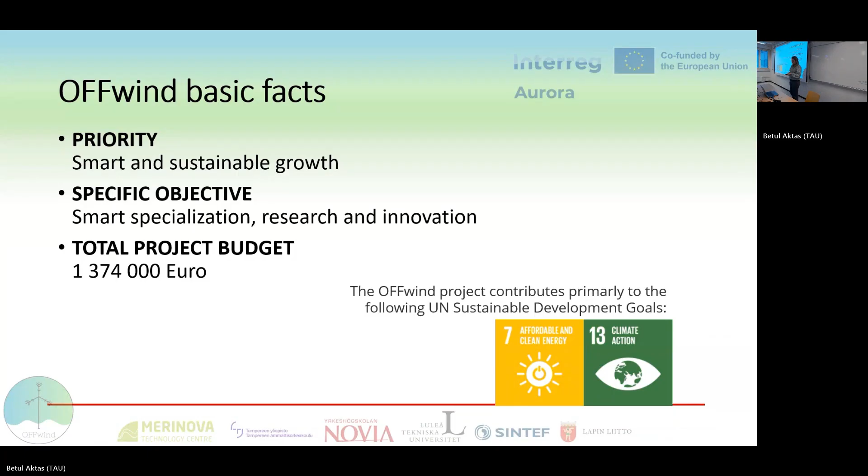About goals and aims of the project: the overall objective of the OFFwind project was to boost the uptake of offshore wind energy in the Aurora area by overcoming the Arctic challenges. We have reached this by working on the aims in the second paragraph.

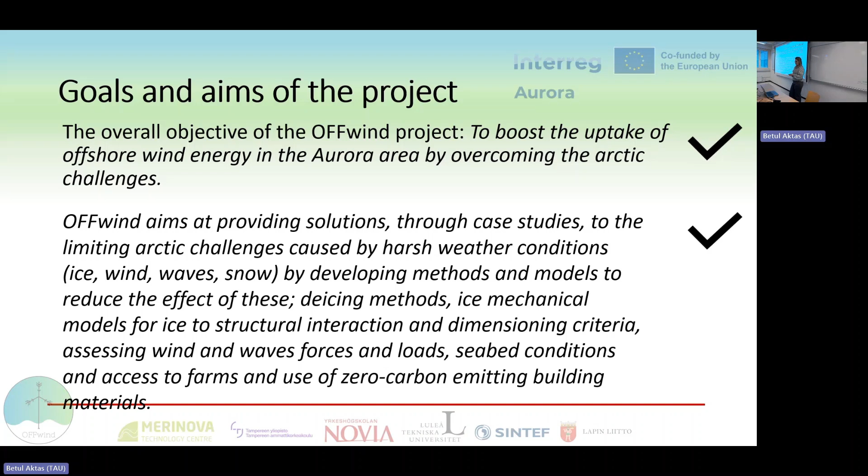We have to provide solutions through case studies to the limiting Arctic challenges caused by harsh weather conditions, ice, wind, waves, snow, by developing methods and models to reduce the effect of these: de-icing methods, ice mechanical models for ice structural interaction and dimensioning criteria, assessing wind and wave forces and loads, seabed condition and access to farms, and use of zero carbon emitting building materials.

We are a consortium that provides complementary skills to the project. Luleå Technical University comes with concrete technology knowledge. SINTEF with knowledge about ice condition, ice mechanical and ice structural interaction. Novia with icing and de-icing knowledge, and Tampere University with surface modification and coatings as expertise.

We have also made some very valuable excursions: first to the wind farm site in Korsnäs with the whole team in 2023. Also a smaller team did ice measurements on the wind farm site in Korsnäs in 2024. We also visited the High Water Bridge construction site in 2024. This is in our region, and we got a good view on how to construct and build in marine and cold climate.

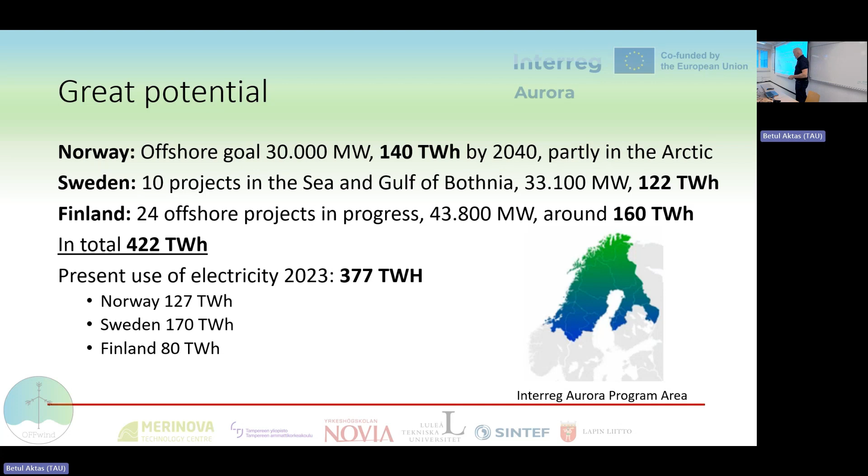Here we see the Interreg Aurora area, colored to the bottom right, and we have the Sea and Gulf of Bothnia, Northern Baltic Sea, and the Norwegian coast, of course interesting for wind power.

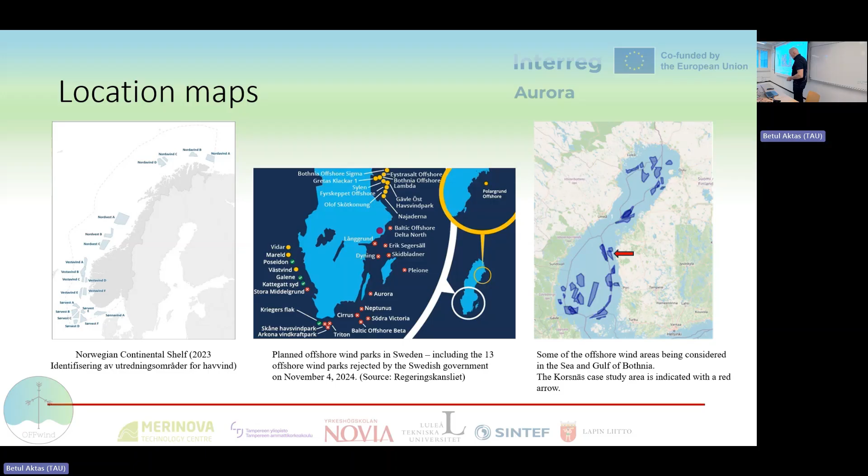Interesting when we look at these 10 yellow parks in Sweden and one very far north in Polargrundet in the North Bay of Bothnia. Interesting is the depth, between 18 and up to 80. To summarize, inside the Baltic, the Bothnia Gulf and Sea, it's suited for bottom fixed turbines.

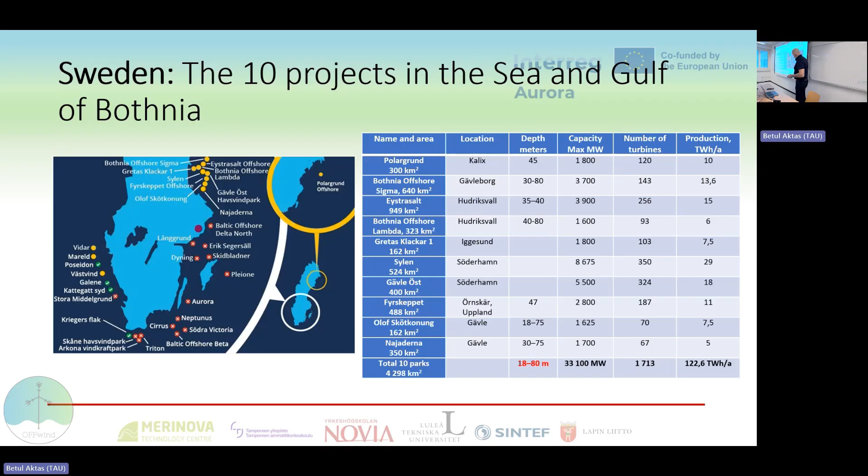This is in general. Now in Vasa, where I come from, ABB makes subsea power stations, then transformers, subsea transformers. So that is also one alternative. It does not have to be above sea level, it can also be a submarine transformer.

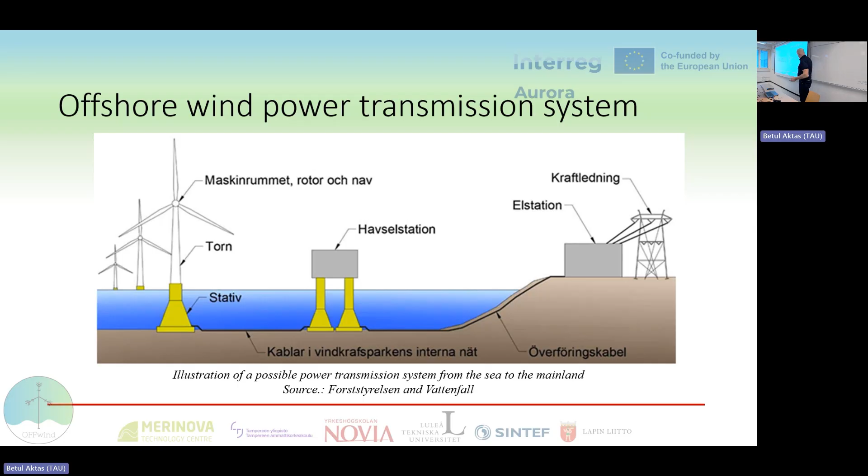We have Korsnäs. I think the Korsnäs case, Vattenfall Metsähallitus Forststyrelsen, is quite representative for a park in the Baltic Sea. We see here offshore turbines and two alternatives for cables. The onshore connection will be to the power station in the north where the airport is, around 50 kilometers, and a considerable distance to Åback and Kristinestad in the south, 80 kilometers.

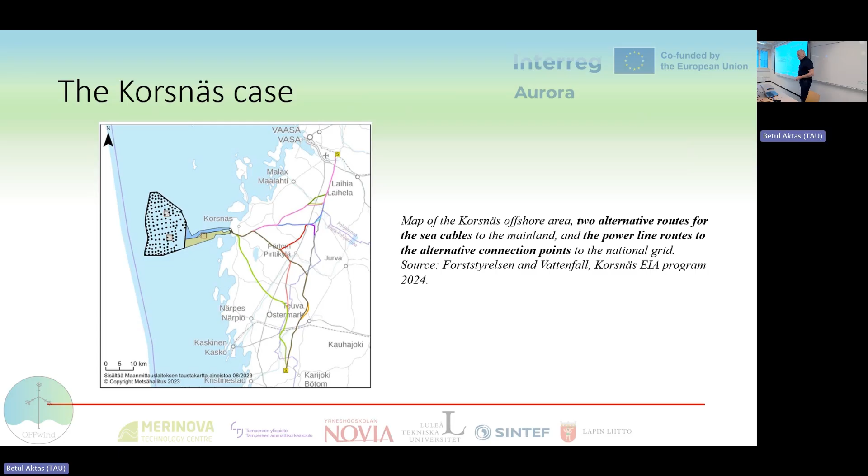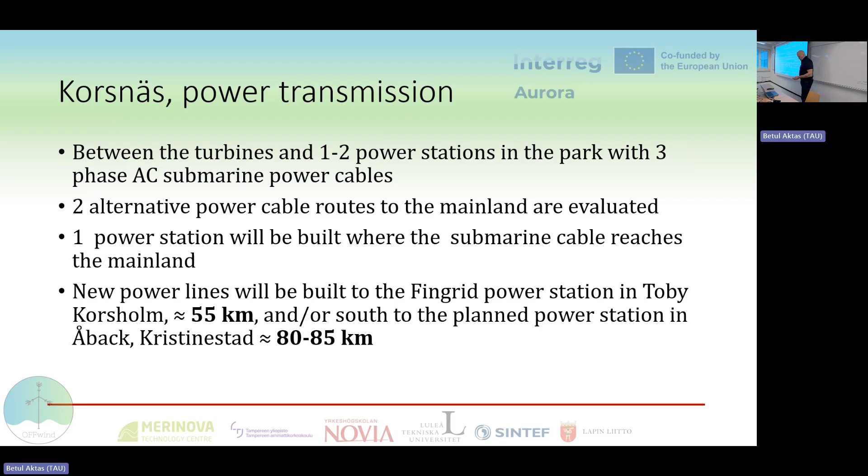So one central factor in the feasibility of the park is, of course, who pays for the grid connection. In this case, because we don't have a stable grid near the sea in most places, it's a considerable cost. There will be 55 to 85 kilometers of onshore connection, which is not free.

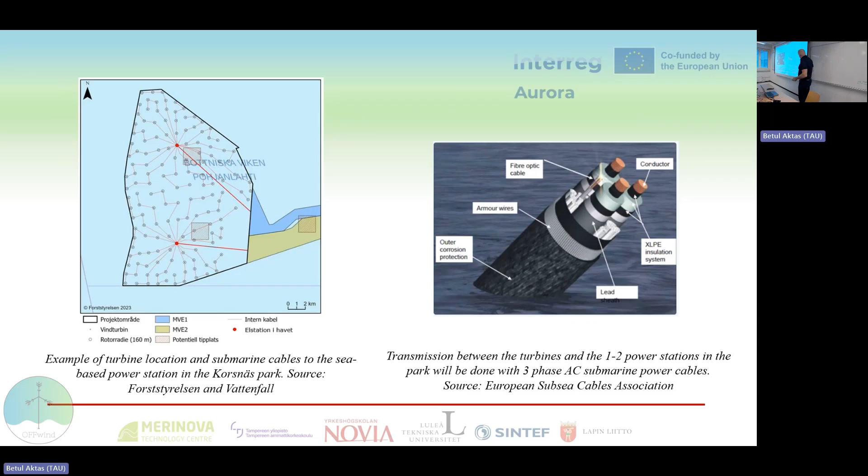This is an example of the Korsnäs layout from the EIA program, and then the three-phase cables, most likely to be used for submarine cables, used in the transmission inside the park to the substations.

Some facts of the Korsnäs park, I think it's quite large, but representative of the projects ongoing in the Sea and Gulf of Bothnia, also quite similar to the Swedish parks in many ways: 15 to 30 kilometers from the coast, quite good wind speed, 9.3 to 10, and the stated max capacity in the program is 25 megawatts.

Talking about the parks now, I've looked at turbine sizes between 15 and 20, up to 25 in capacity. So that means it's an evolving industry. Every new turbine size is basically a prototype with some surprises, not so easy to predict. And the height is many times between 300 and 400 meters.

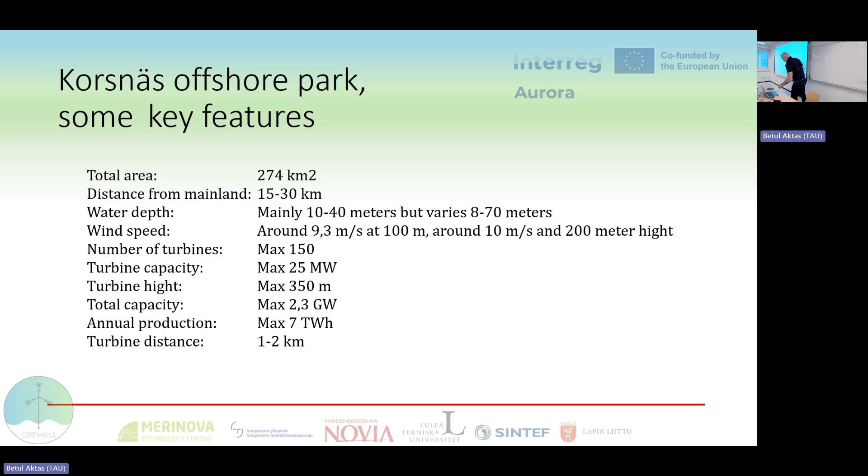I was talking to experts some years ago, and they said we don't fully know what happens in the air so high. There could be some low-level jet streams and so on. On the west coast in Vaasa, we've had 2 rotor blades break, due to very high and very strong powers.

Challenges - then of course icing. We will hear about that, both on turbine rotors, pack ice and drift ice, ice damage on submarine cables, ground waters, remote locations, accessibility, maintenance problems, long distances to connection points. We have north-south in all three countries limited power transmission capacity - people in the south, much of the generation in the north, salty challenging environment, and an evolving, developing industry.

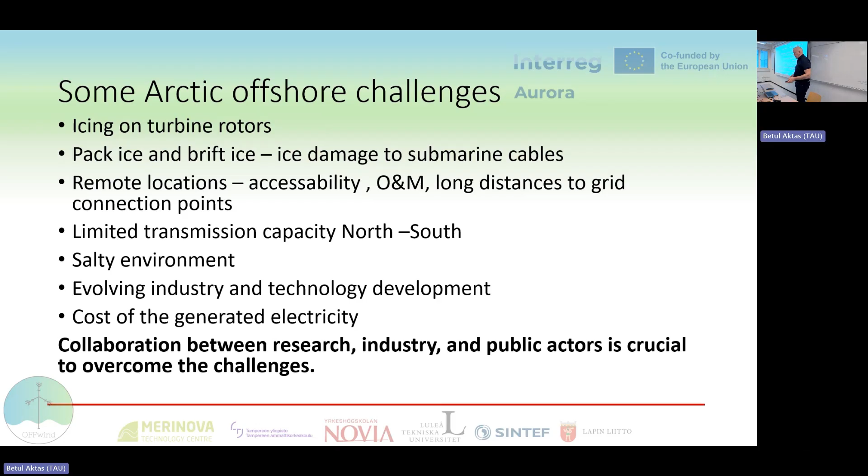There is no mass production, it's more on the level of prototypes. So the cost of generating this electricity is not the cheapest, but there are a lot of challenges, and I think collaboration is needed to solve these challenges between industry, public sector, and different institutions with specific competence, to overcome them.

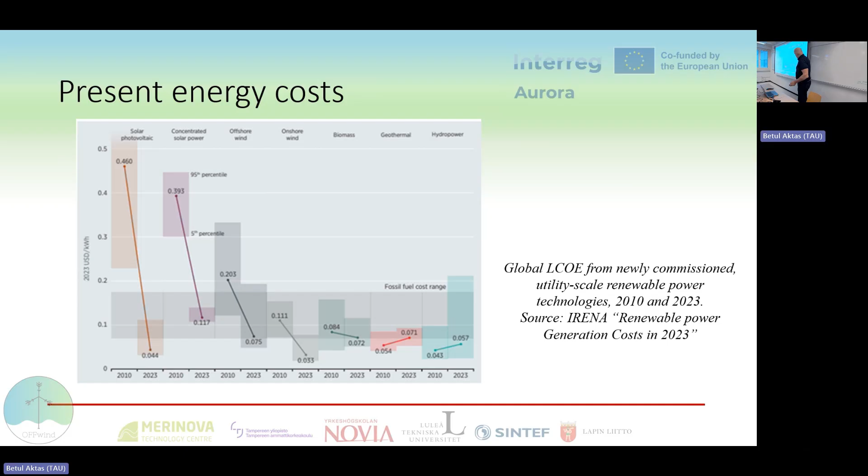We have, to the left, seen a dramatic drop in the solar PV sector due to mass production in millions. Also offshore and onshore wind power has dropped, and there are predictions about future offshore costs, summarized in the table to the right.

If we look at 2050, this is the mid scenario: a fixed bottom offshore park is predicted to reach around 72 dollars per megawatt hour, equal to 7 cents, and floating will always, I think, be more expensive. In the optimistic case, it could go down to 6 cents, but predicting the future is very difficult.

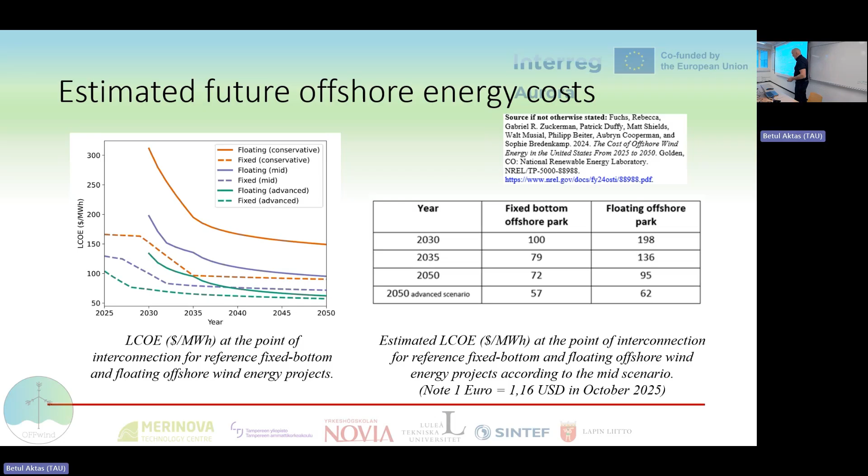So you see the gap between the orange top line for conservative predictions for floating, and the fully drawn green line, which is the most optimistic scenario, versus the pessimistic one for floating - it's a big gap, very difficult to predict. Thank you.

Hello, my name is Bjørnar Sand, and I'm going to present a preliminary environmental and technical feasibility study of offshore wind turbines in ice-infested waters.

An offshore wind park is located in cold region marine environments with seasonal and dynamic ice conditions. This is an early phase development of an offshore wind park, so full implementation is not considered in this project. The primary objective is to understand the environmental load, ice and metocean pre-assessment, evaluate the technical feasibility of gravity-based foundations for wind turbines in ice-infested waters, and develop a general framework for ice metocean pre-assessment and feasibility study assessment of gravity-based foundations.

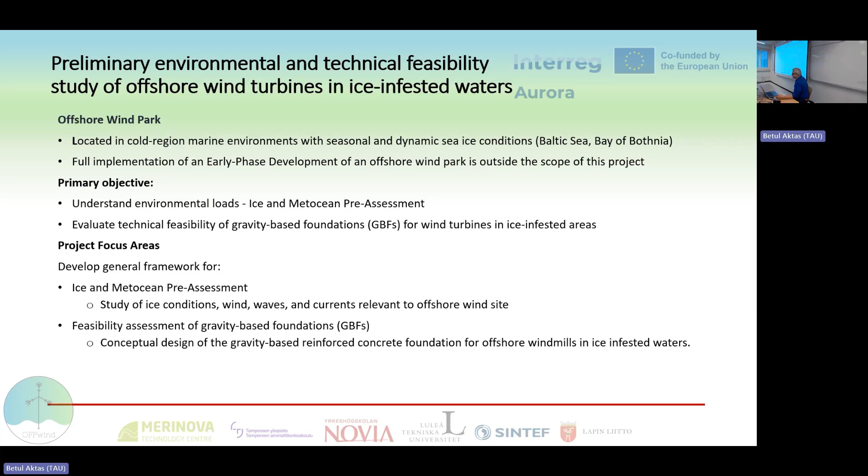As a case study, we have looked at the Korsnäs wind farm area outside Vaasa off the Finnish west coast. For the environmental study, we have used a total of 4 weather stations and 2 buoys in the sea, using temperature data for estimating ice thickness, marine weather observation, wind speed, wind gust speed, wind direction, wave height, wave periods, and wave directions.

For estimating ice thickness, we have used a generalized extreme value analysis, with the objective to estimate the extreme ice thickness for structural design of offshore wind farms. The data source is the FMI weather stations at Korsnäs. We fitted the generalized extreme value model to the historical data, and the goal is to find the 50-year return level of ice thickness, which is approximately 0.8 meters.

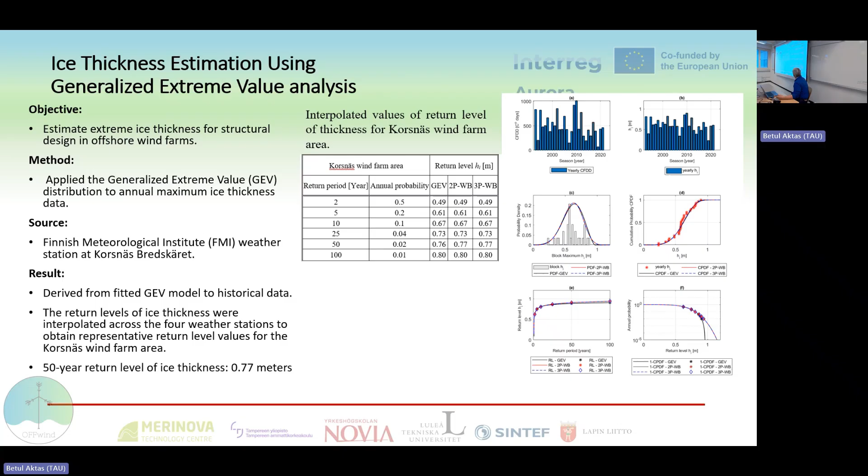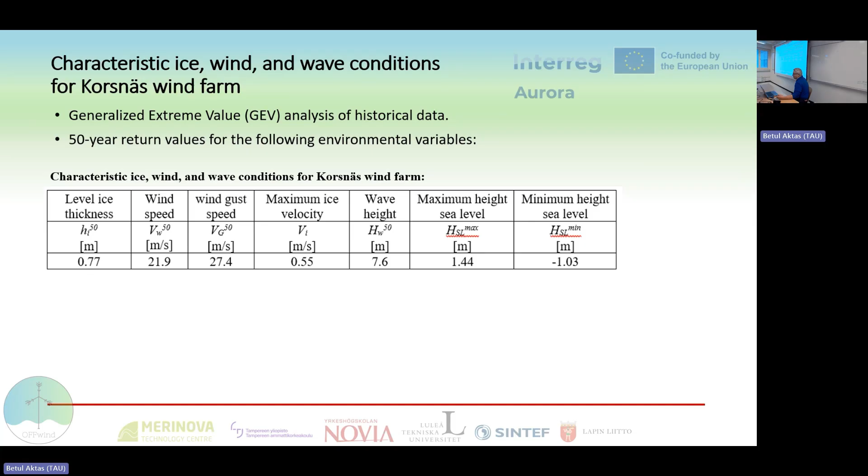Characteristic metocean conditions for the Korsnäs wind farm area: the level ice is 0.77 meters, wind speed 21.9 meters, and wind gust is 27.4. The maximum ice velocity is approximately 0.6 meters, wave height 7.6, maximum wave height, high sea level is 1.44, and minimum sea level is -1.03.

We have done some optimization framework for gravity-based foundations in ice-infested waters. The purpose was to find a preliminary feasibility assessment of gravity-based foundations for offshore wind turbines in ice conditions. We used a MATLAB-based optimization platform and focused on geometrical optimization, aiming to minimize the concrete volume. We used design criteria for stability and overturning, load capacity, structural stress limit, combination of eigenloads and environmental loads, and the ballast of the structure. Stability is done in the ultimate limit state using partial factors for load and soil properties.

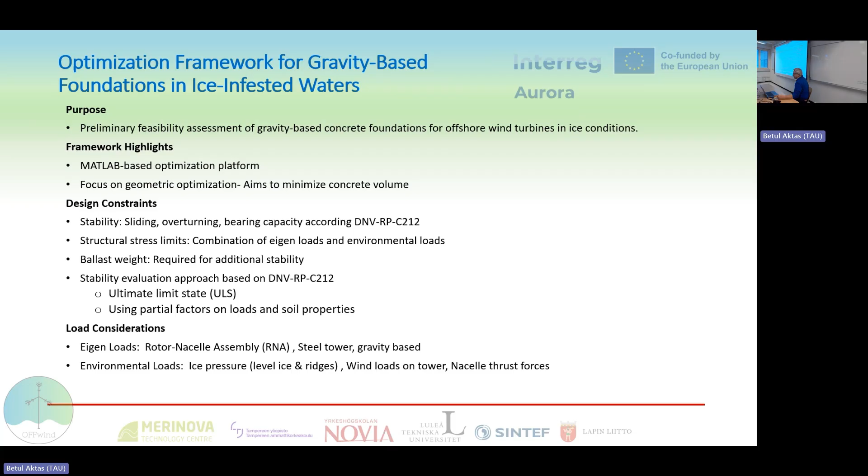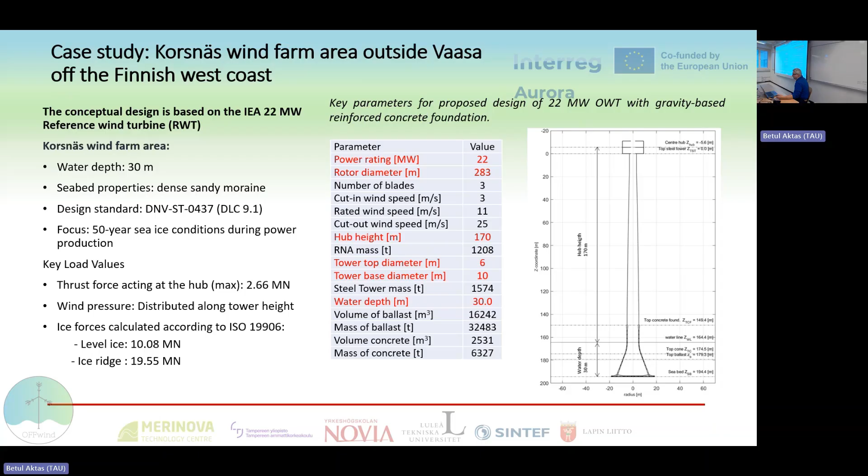Tower diameter at the top is 6 meters. Tower base diameter is 10 meters. Water depth is 30 meters.

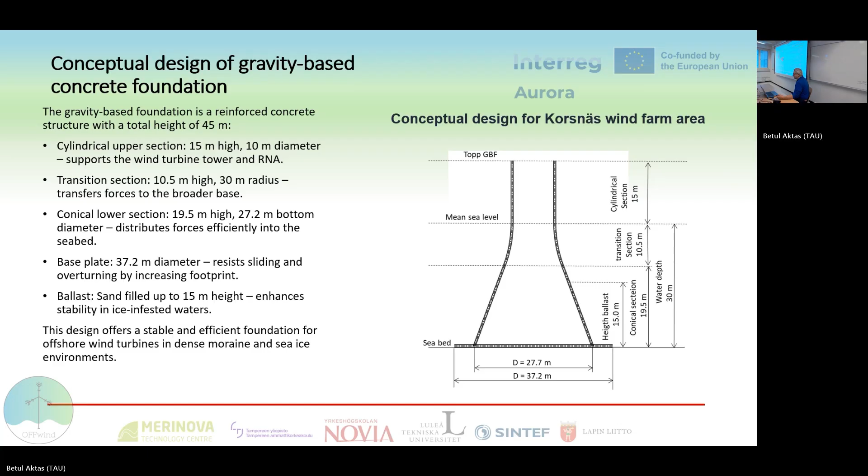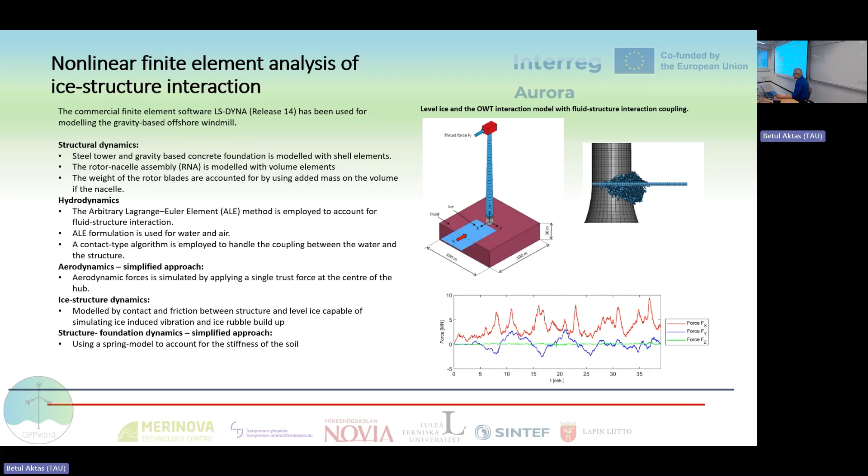We have done some non-linear finite element analysis of ice-structure interaction. We considered the structural dynamics, hydrodynamics, aerodynamics, and ice-structure dynamics, and included the structural foundation dynamics using a simplified spring model.

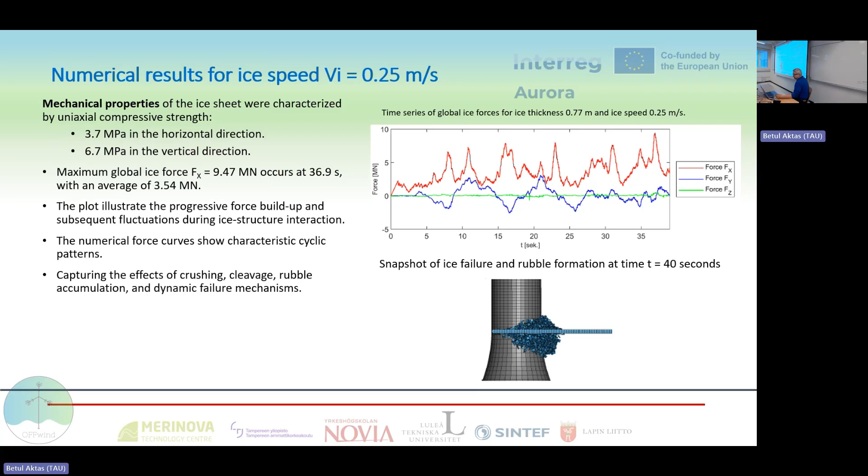The numerical results, for ice speed equal to 0.25 meters per second, show the mechanical properties of the ice sheet characterized by uniaxial compressive strength of 3.7 in the horizontal direction and 6.7 in the vertical direction. The maximum global load in the horizontal direction is 9.47 meganewtons, with an average of 3.54 meganewtons. You can see that the ice forces are extremely dynamic. The figure also shows a snapshot of the ice failure and rubble formation at the end of the analysis, where the ice rubble accumulates in front of the foundation.

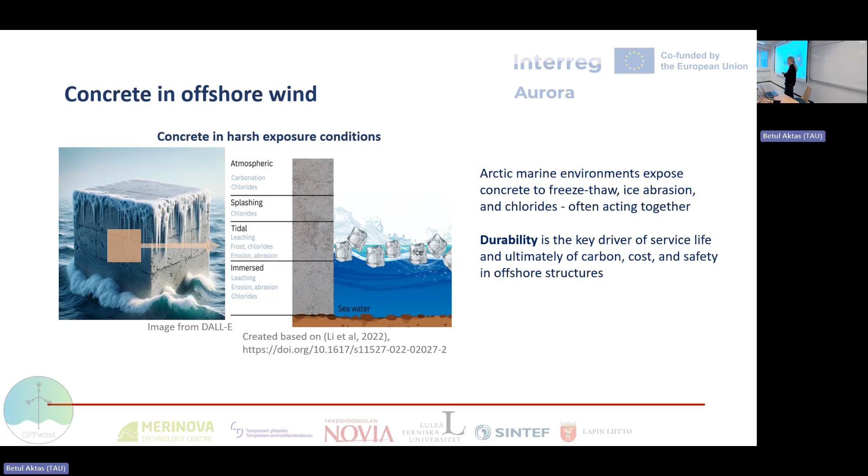When we consider new types of binders, ones we are not used to so much yet, that are coming from waste and would decrease the carbon footprint of concrete, we still have a lot of challenges when it comes to accepting them, even if they're behaving very well in this kind of conditions.

Another question, what we tried to analyze in this project, is how to approach low carbon concrete in general for offshore wind. To be able to help decision makers accept low carbon concrete offshore, we need evidence that we can lower the carbon footprint, but in connection to durability and service life. To solve this problem, we also need to identify what we need, so what are the gaps and challenges.

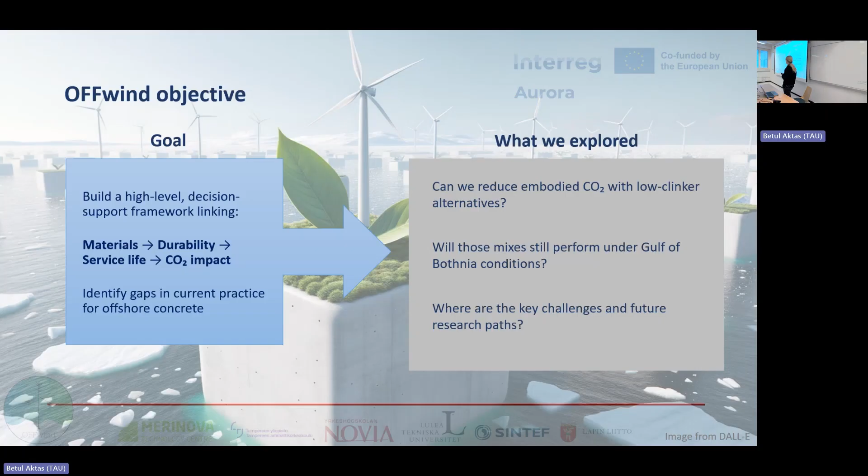Within the project, we did several different activities. We determined the R&D gaps based on the current state of art. We established a modified, simplified LCA framework to be able to include durability and perform calculations for different types of concrete. We also did some lab tests for the durability screening of selected low carbon concrete mixes, taking into account accelerated lab tests and also lab tests with natural seawater captured in the Gulf of Bothnia. This resulted in a couple of contributions together with our partners from Novia and SINTEF.

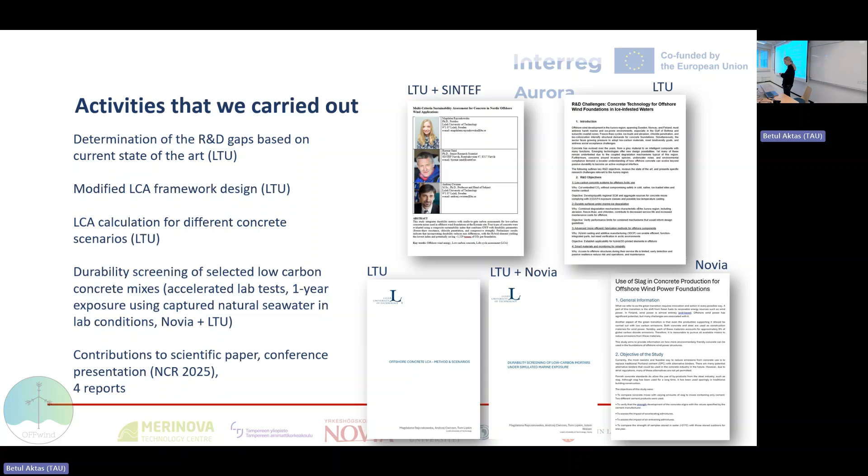Some of them are already on the website that Petra showed in the beginning. Some will be published later next month. So here, because the time is short, I will just show the highlights.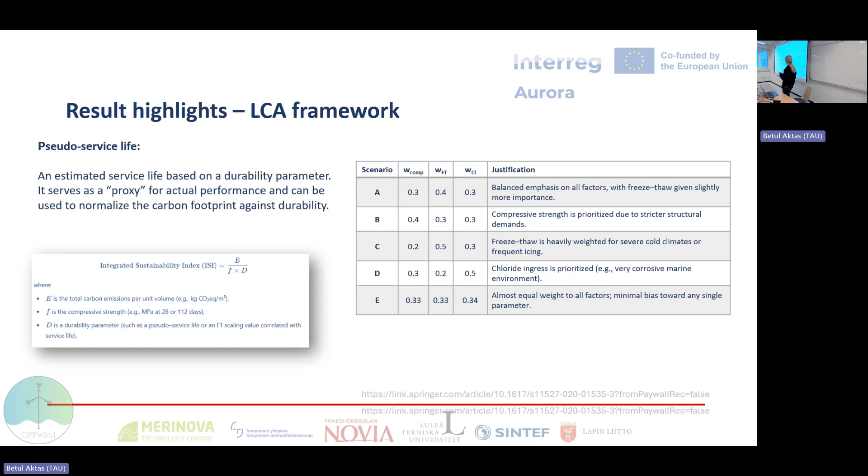Regarding the durability framework, as I mentioned, the majority of LCA calculations that you can find in literature still focus on the cradle to gate approach. What we wanted to do here is try to make a very simple parameter that we can use to assess different low carbon solutions for offshore concrete foundation, including the durability parameters that we need in this case—the freeze and thaw performance and chloride resistance, and also strength—taking into account different scenarios with different weights to see what the results of their carbon emissions are in those situations.

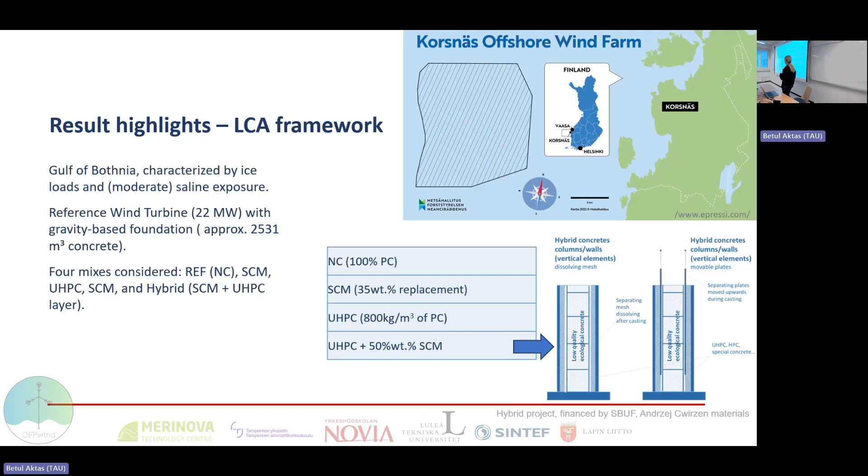Here we not only took evidence for the mixes typically analyzed, which are with replacement of cement with supplementary cementitious materials. We compare them also with ultra high performance concrete, which has very good durability parameters, but also some other types of solutions which we are working on, for instance involving a hybrid material consisting of UHPC and low carbon concrete with high SCM replacement, to see how their results look like when it comes to carbon emissions.

If we look at the comparison, this is just one of the results. If we compare the typical analysis with cradle to gate from the extraction of materials, we can see that UHPC, because of the high amount of cement, is the highest when it comes to CO2 emissions. Then the SCM and the hybrid mix are the lowest.

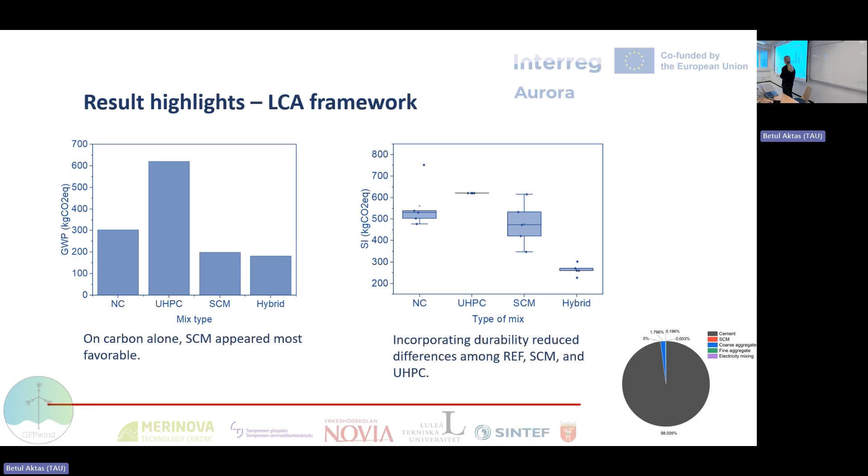On the other hand, if we take into account the durability parameters with different scenarios that are input there, with the cases that we studied that I showed you before, we can see that those differences are not so high between those different mixes, but the hybrid mix performed the best when it comes to the carbon footprint.

If we look at the highlights from the laboratory tests, where we tested different low carbon mixes with volcanic ashes and slag together with Novia, we can see that actually the low carbon concrete in some cases presented better behavior than the reference mix, which gives possibilities to study this further.

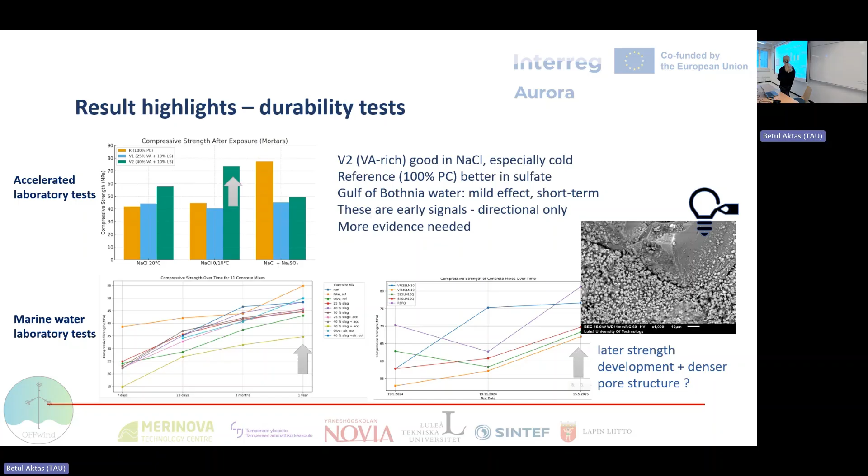With the test with the water from the Gulf of Bothnia, because of the low salinity, the effects were even lower than with accelerated tests. Actually, we observed the increase in strength after 1 year, so we are still looking deeper into the microstructure to understand it better.

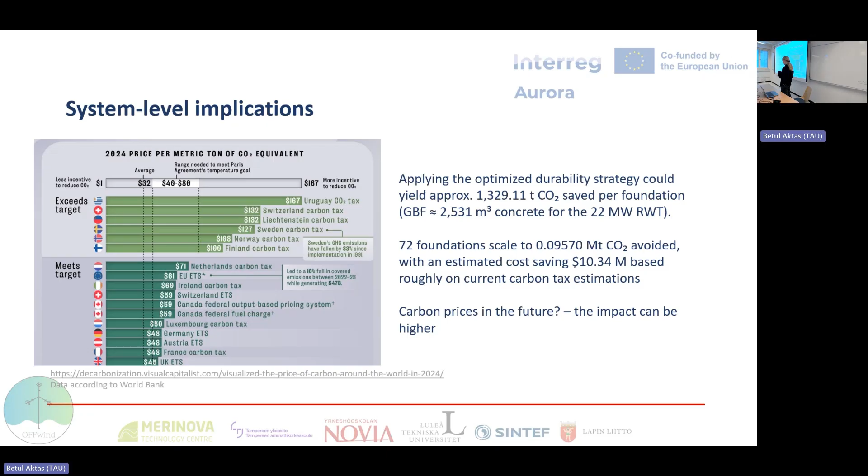Looking at the whole system of offshore structures, if we consider concrete, it's actually not such a small part, and it can give us substantial savings if we look at the numbers calculated for the case that Bjørnar showed earlier, taking into account our LCA calculation. With increasing carbon prices in the future, we predict that the impact from CO2 decrease by low carbon concrete can be even higher, so it can have a positive effect on the whole acceptance of those kinds of structures.

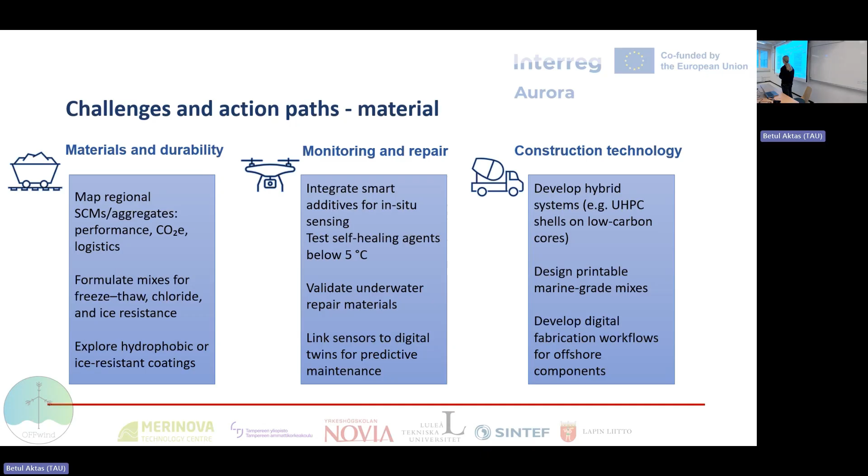We also established some additional challenges and potentially interesting topics to study. I will refer you to our report, not to waste too much time. But in general, to conclude this part, from the numbers we have seen, low carbon concrete for offshore is promising, but it requires more durability evidence, especially in pilots in real conditions. LCA must include service life and real exposure conditions to guide decisions, and collaborations like we had in the OFFWind project are definitely necessary to push this topic further. Thank you.

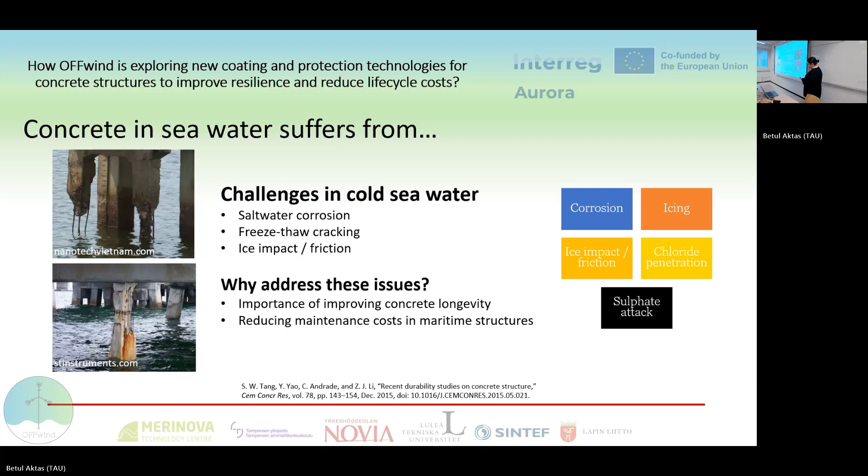Where we have focused here at Tampere University is finding new coating technology to protect these concrete materials. During this project we started working with thermal spray, which is a coating production technology, to produce coatings on these different structures. We selected this technology because it's very well-known in industry and can be industrially used, with a wide range of coatings and substrate materials available, high coating production rate, efficiency, and good coating properties.

One further benefit is that we can produce coatings on large surfaces, which we are dealing with here for wind turbine foundations. It's a process where we have a feedstock material - what we want as a coating - in the form of powder or wire. Then we have a heat source to melt that material, and we accelerate it towards the surface where we want to build up the coating. These molten particles hit the surface, impact, and start building up the coating. It's a fast process, and we have good experimental facilities here to do these coatings. It can be produced on different types of surfaces and geometries, which is why we consider this technology for these concrete materials.

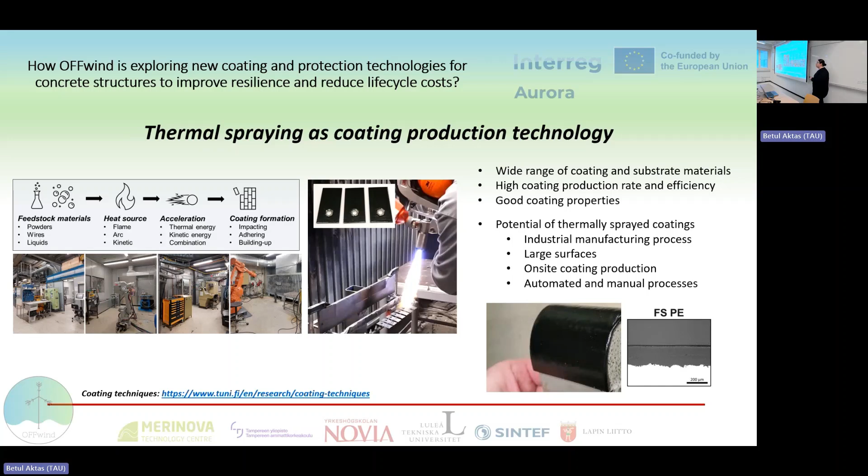But as mentioned, these cold conditions also bring new challenges, so icing conditions are challenging. These coatings have already shown icephobic properties, so this way we can also get icephobic solutions on the surfaces. The technology itself can be used for different purposes and forms, or there are also paints and other hybrid materials, more typical ones that have been used, but we can go with these thermal spray coatings to get protection from ice, but also other barrier properties, combining these.

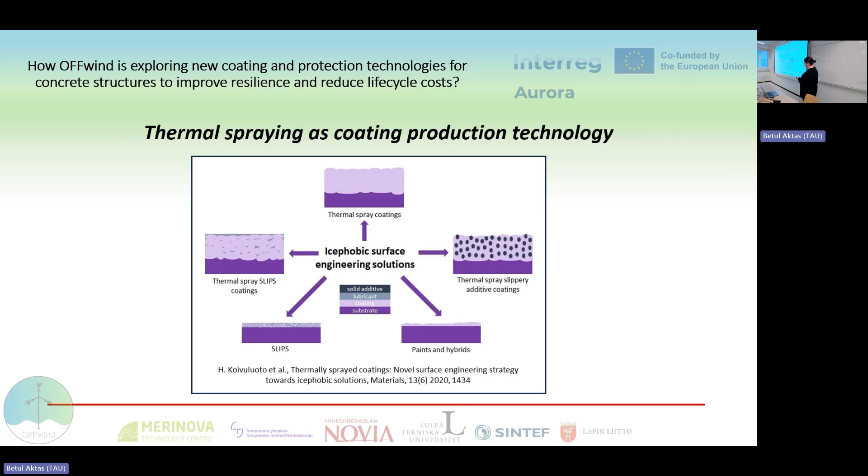In this project, a multi-layer structure coating system has been developed to get this protection. If we think about concrete as a substrate material, then we add a bond layer - in this case an electric arc sprayed zinc coating, which also gives corrosion protection needed in seawater conditions. Then we can apply a top layer, which is a flame sprayed polyethylene coating, and we get this kind of multi-layer structure with multifunctional properties.

There is one publication and open access proceeding paper related to these coatings, which was presented at the IWAIS conference, and this was a collaboration with LTU.

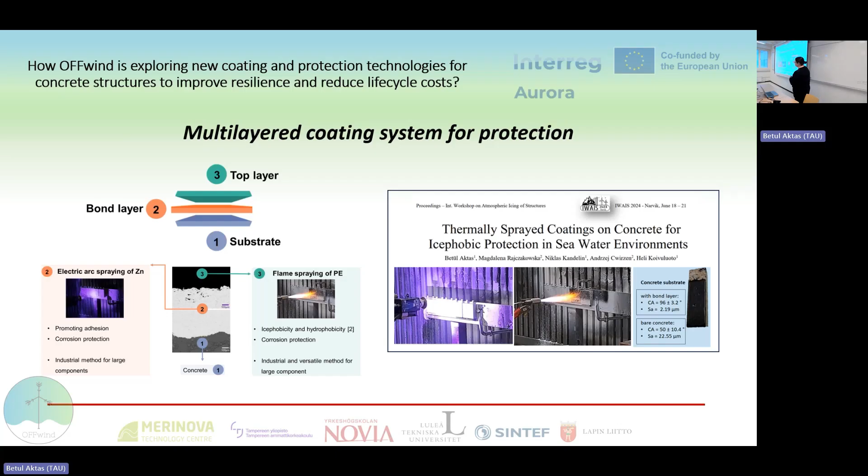If we think about these solutions and multi-layer structures, there are other options as well. We can have thermal spray coatings as protective layers, and a polymeric top layer nicely covering the surface, as you can see in that video. This way we have another option to protect the surface and achieve function in these seawater conditions.

There is also a conference paper published in the International Thermal Spray Conference focused on this. During this project we developed different material and coating systems to give multifunctional protection on concrete materials, using industrial technology for the first time on concrete. It needed quite a lot of development work, but now we have seen its potential.

Because we are dealing with that kind of environment with different challenges, testing is also important. We have focused on developing icing testing to be closer to showing these requirements from the conditions, and seawater icing testing was something needed, which has been developed in this project.

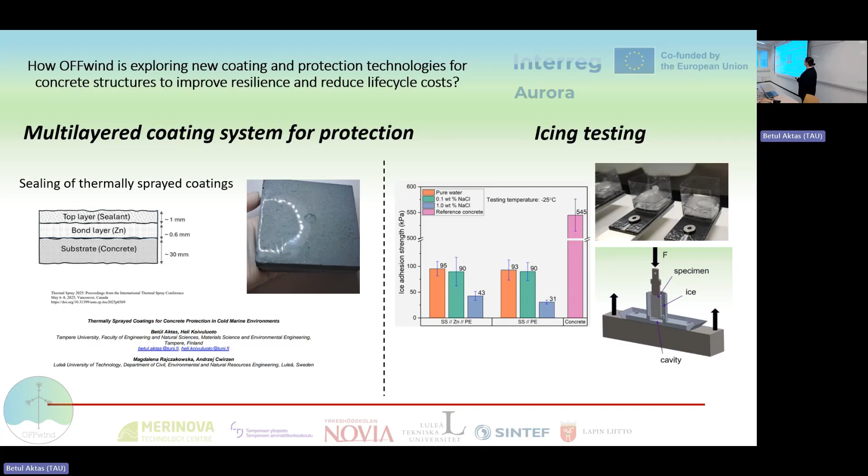Because these coating systems have shown their potential, we are continuing this work after this project. It's not finished work yet, but it shows good results and promise, so it's definitely something we should continue, in collaboration with others on material development, and also connecting the modeling part to find the best solutions and in future make protective multi-material systems in this field. Thank you.

It's Bjørnar Sand again, I will present some more work we have done. We have looked at different types of foundations for offshore wind turbines for water depths below 60 meters. Bottom-fixed foundations are feasible: monopile structure, gravity-based structure, multipod foundation, jacket or lattice foundation, and suction caisson.

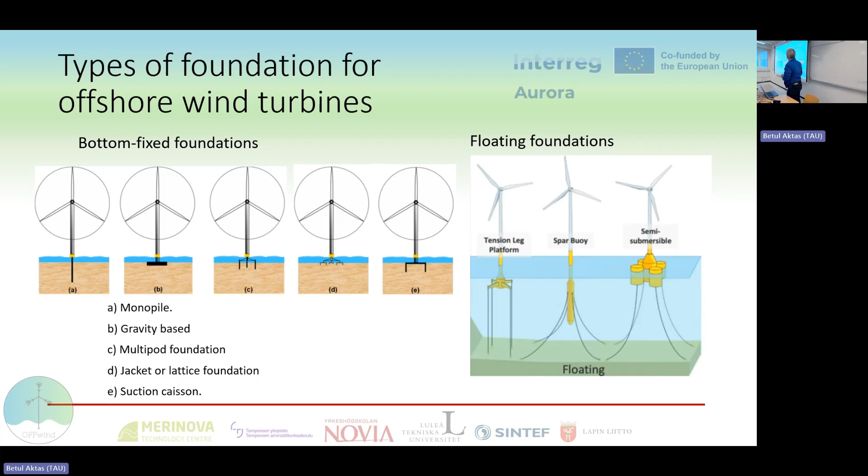For deeper water we need to use floating foundations. Examples are tension leg platforms, spar buoy, and semi-submersible.

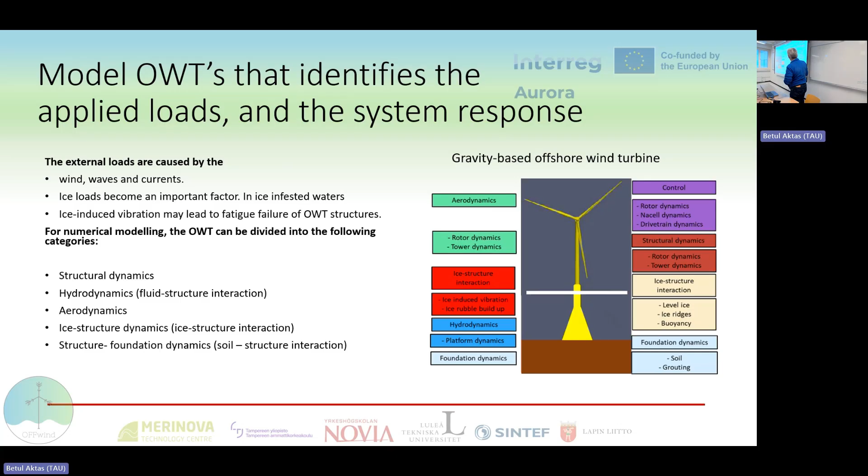We have looked into a model for offshore wind turbines that identifies the applied loads and the system response. External loads are caused by wind, waves, and current. Ice load becomes an important factor in ice-infested waters, and ice-induced vibration may lead to fatigue failures of offshore wind turbine structures. For numerical modeling we can divide into categories: structural dynamics, hydrodynamics (fluid-structure interaction), aerodynamics (thrust force on the turbine and wind forces on the tower), ice-structure dynamics, and lastly structure-foundation dynamics.

We have done a case study for a floating wind turbine farm, Nordavind D. It's 15 megawatt wind turbines, 100 floating wind turbines, and the turbine area is 700 square kilometers. A high voltage DC converter station floating, 100 AC array cables to the offshore converter station, one DC electric cable to the land station, and a connection to the national power grid.

1500 megawatts in electric power production, and yearly production is 6.5 terawatt hours.

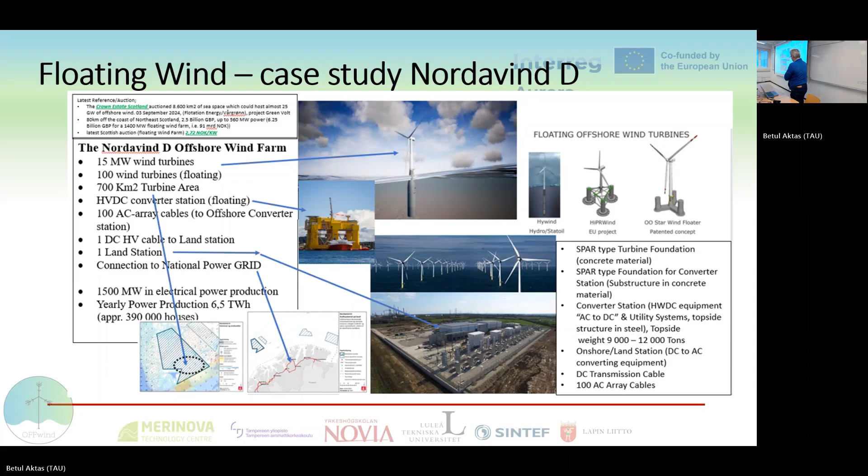Technology improvement for offshore wind turbines for this Nordavind D case: to reduce the levelized cost of energy, capex and opex, technology improvement can lower costs and involves low carbon concrete, improved surface production systems, serial production of substructure, larger turbine structures in serial production, more effective mooring systems, more effective installation, improved array cables, improved high voltage DC cables, and increased operational service life, about 50 years.